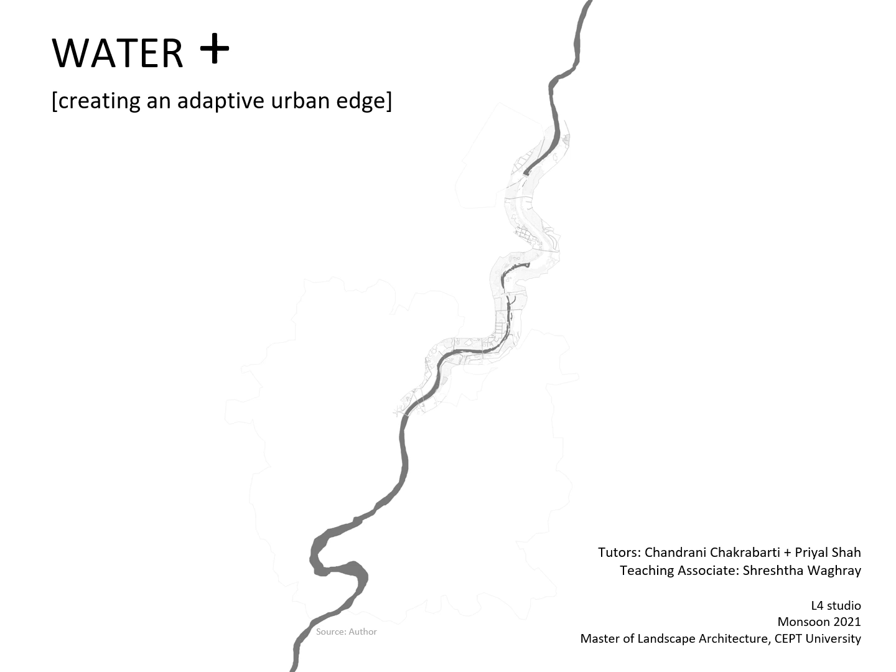The unit focuses on the link between water ecology and community. With urbanization, the role of urban rivers changes. To meet the demand of people as alternative means of water resources are imagined for the cities, people gradually disassociate from the river. Hence, with time, urban rivers are neglected and forgotten. In the absence of inner city public spaces, it is important to reimagine the river edges as the civic destination for the 21st century.

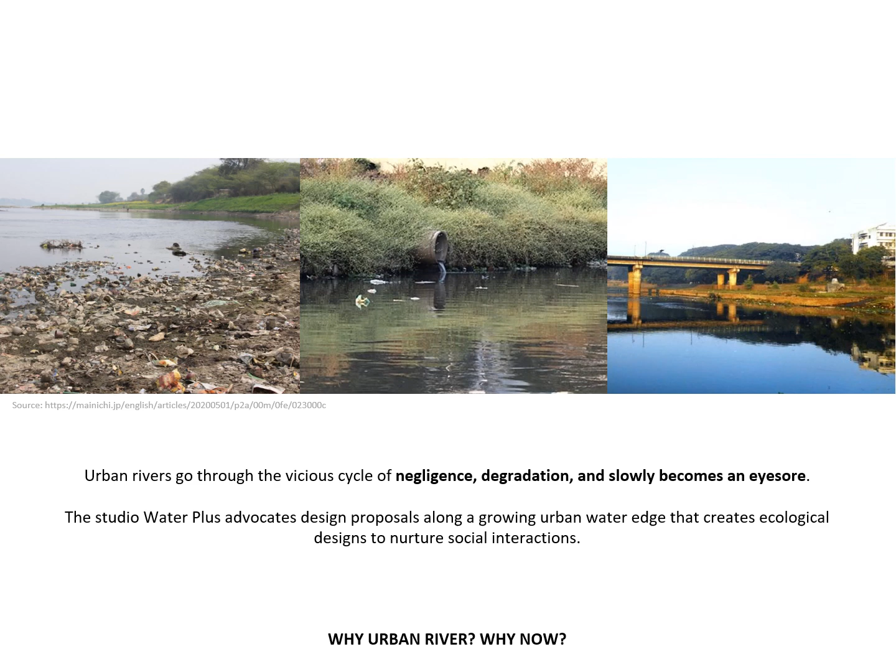Coming to why urban rivers? As mentioned, urban rivers go through the vicious cycle of dependence, negligence, degradation, and slowly become an eyesore, from dumping garbage, sewage, or simply being left underutilized. There has never been a more urgent need to restore these damaged river ecosystems than now. Coupled with this, the United Nations have declared this decade, 2021 to 2030, as the UN Decade on Ecosystem Restoration. The clock is ticking and the time is now.

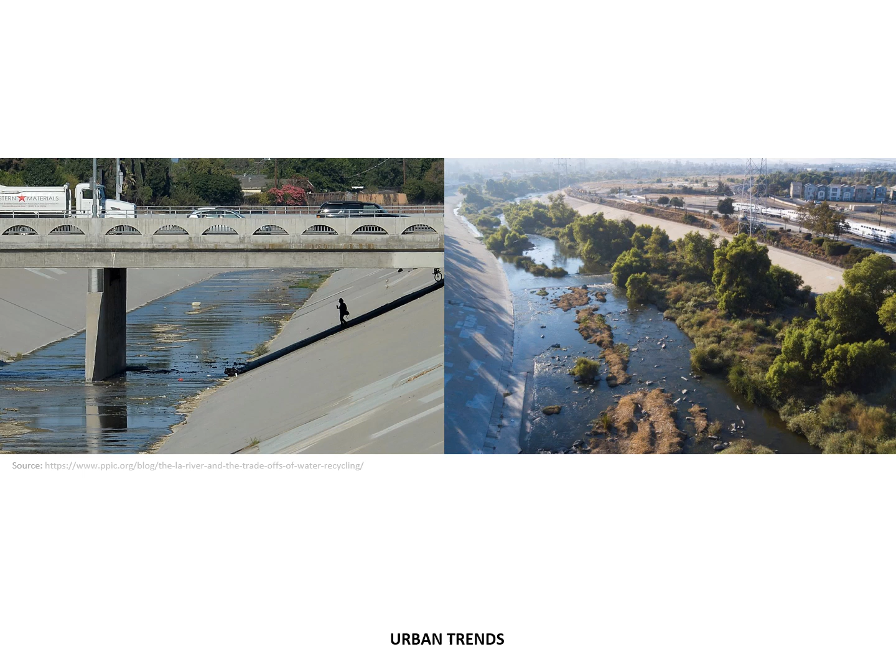Looking across the globe, we see an era of environmental protection and a similar drive to revive urban rivers. Projects are centered around the water edge, be it about increasing biodiversity of a neglected concrete storm drain, or reimagining the underutilized industrial riverbank.

Coming to the question, why here? By 2030, Ahmedabad-Gandhinagar agglomeration is projected to emerge as a megacity. The 28.3 kilometer phase 2 of Ahmedabad Metro project would link the northward developing areas of Ahmedabad as well as parts of Gandhinagar. This agglomeration will have a riverfront exceeding a length of 30 km. Ahmedabad has already set an example in riverfront development by designing the 11-kilometer long civic riverfront at the center of the city. Hence the question arises, how can we reimagine this edge to strike a balance between ecology and community?

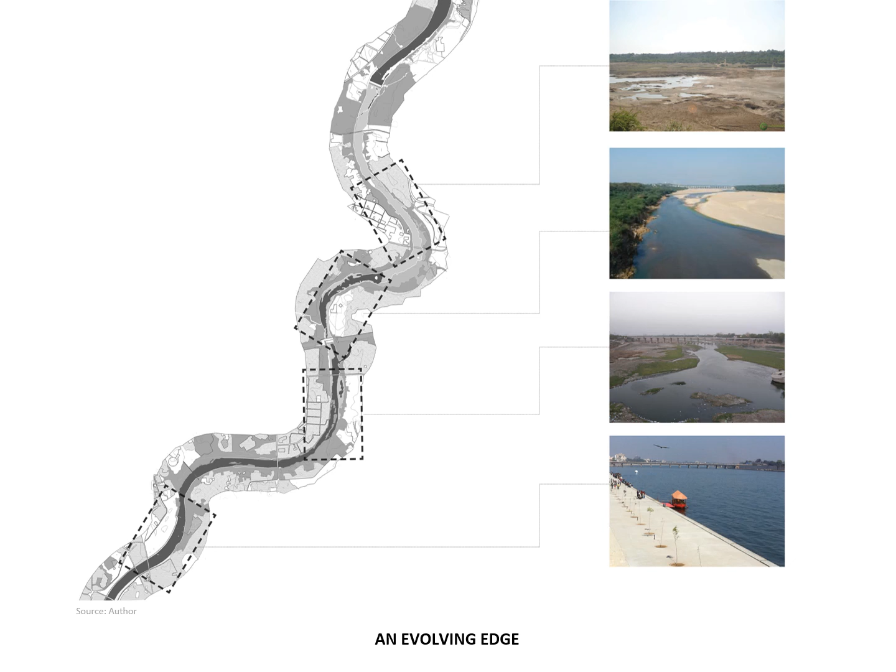In order to artificially hold water, the seasonal Sabarmati River is fed by Narmada Canal and has been intercepted with multiple dams to showcase water only next to the city. This has led to the creation of undesirable patches north of Narmada Canal due to dried up riverbed, vacancy, and complete disconnection from the urban fabric.

To sum up, the unit Water Plus hinges around these questions. Can we imagine an accessible social waterfront that is a great public space? Can this also be a dynamic working landscape that is resilient and responsive to environmental fluctuations? By showcasing the natural process, can this also create awareness and allow positive engagement with water?

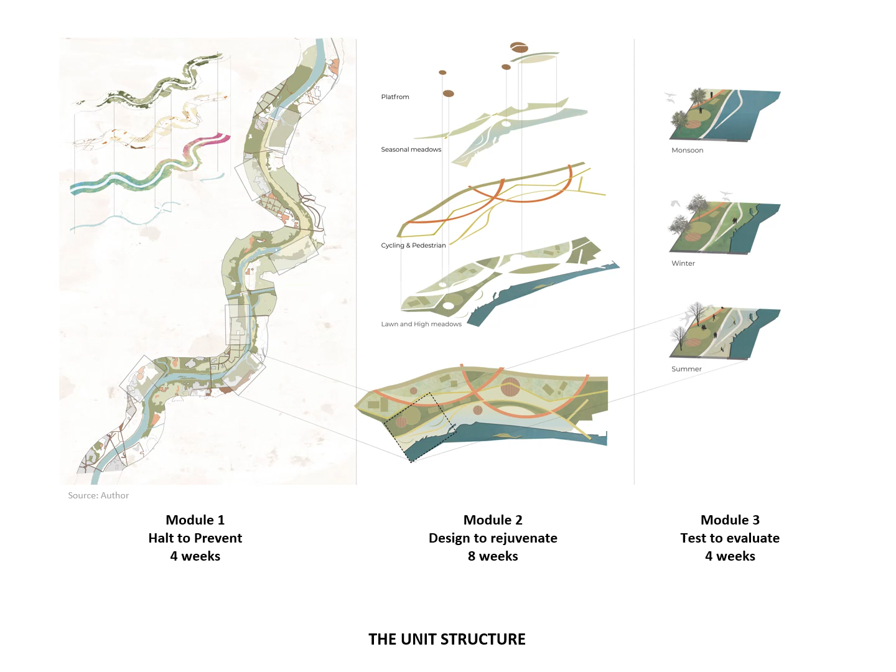Coming to the studio process, it is structured in 3 modules: Module 1, Halt to Prevent; Module 2, Design to Rejuvenate; and Module 3, Test to Evaluate. Module 1, Halt to Prevent.

This first module builds understanding and recording of the site at a larger scale. Students worked in groups of 3 to develop a collective master plan, frame a vision, and identify the potential sites of interest.

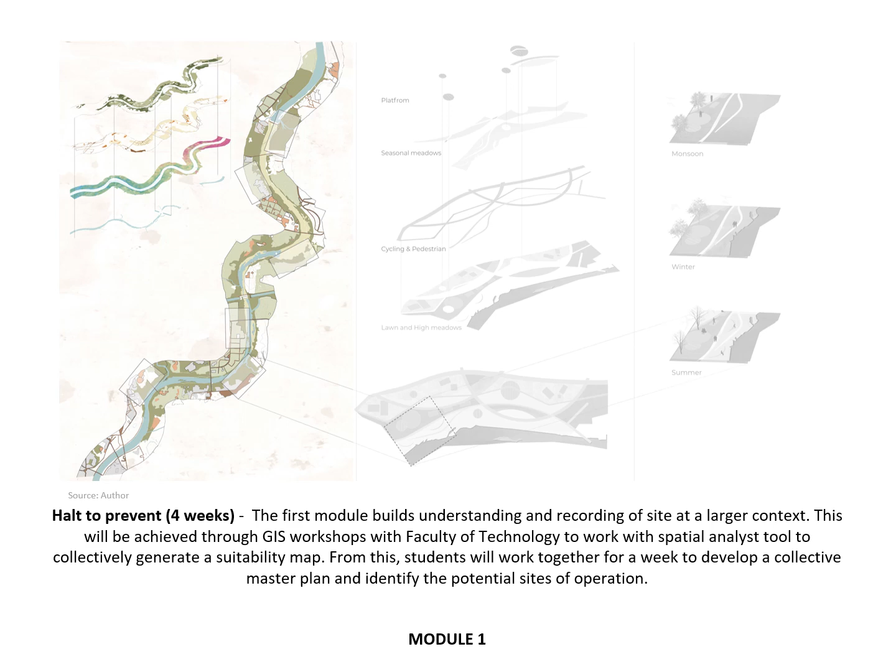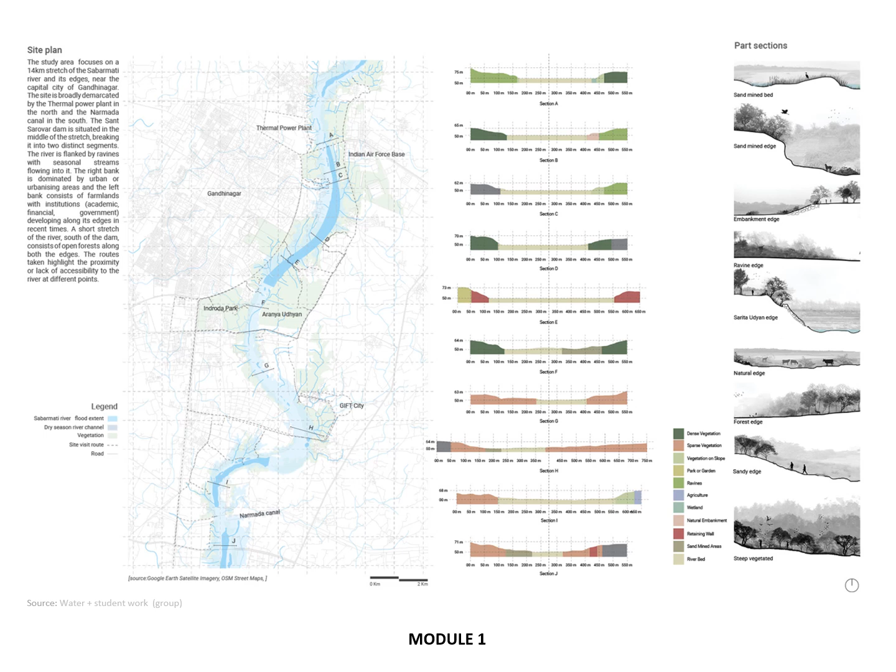Here, students started off by recording different site characteristics, like topography and its experience, character of the riverbed itself, vegetation grain, and soil types.

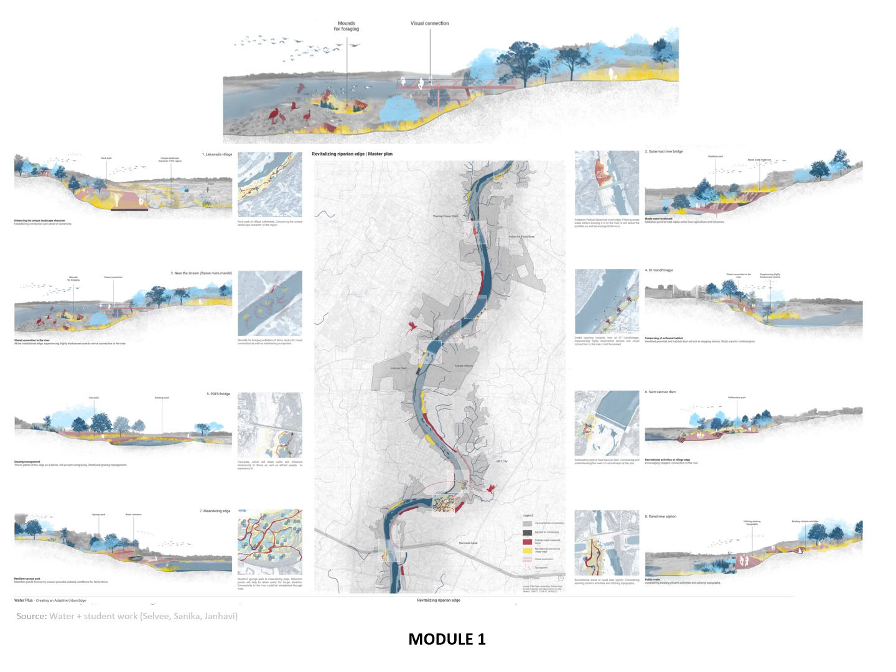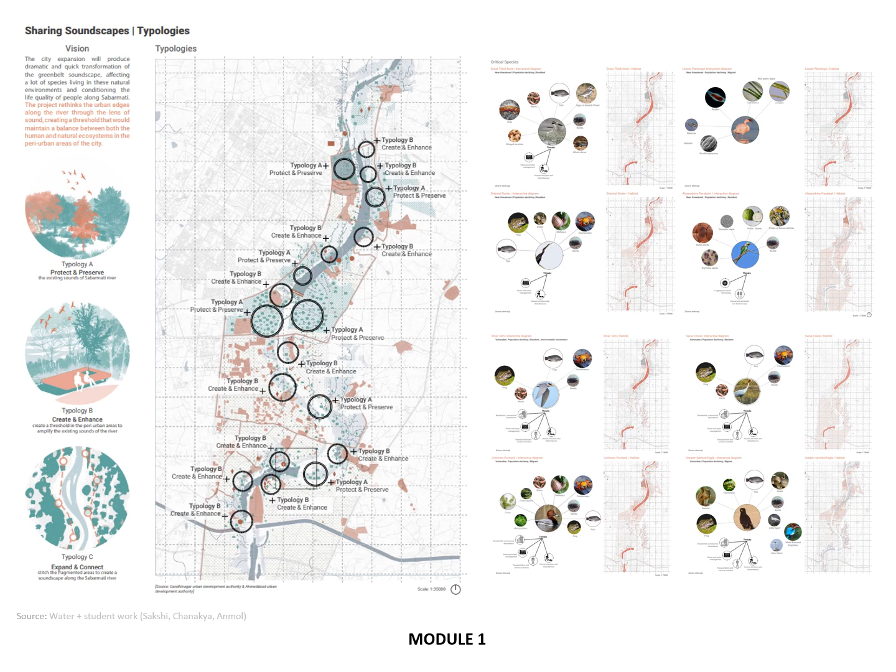These are some output examples from Module 1. This group identified the disrupted connection, both physical and psychological, and tried to reconnect the ecology and community through different edge typologies. Whereas this one looked at shared soundscapes by creating habitats for 8 identified urban fauna which are threatened around the site.

Module 2, Design to Rejuvenate. Moving along the framework set by the master plan, in the second module students individually selected their sites of interest, analyzed the site conditions, and demonstrated a design solution that works at the intersection of ecology and social spaces.

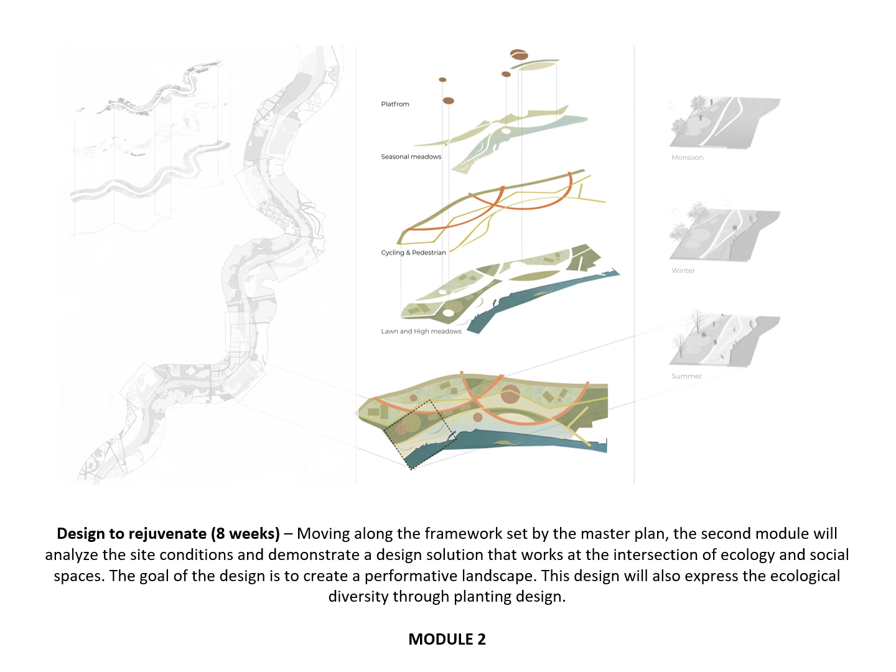These are some output examples. Students started off by exploring programmatic requirements, and then translating these programs on site and creating landscape types that work with the identified programs.

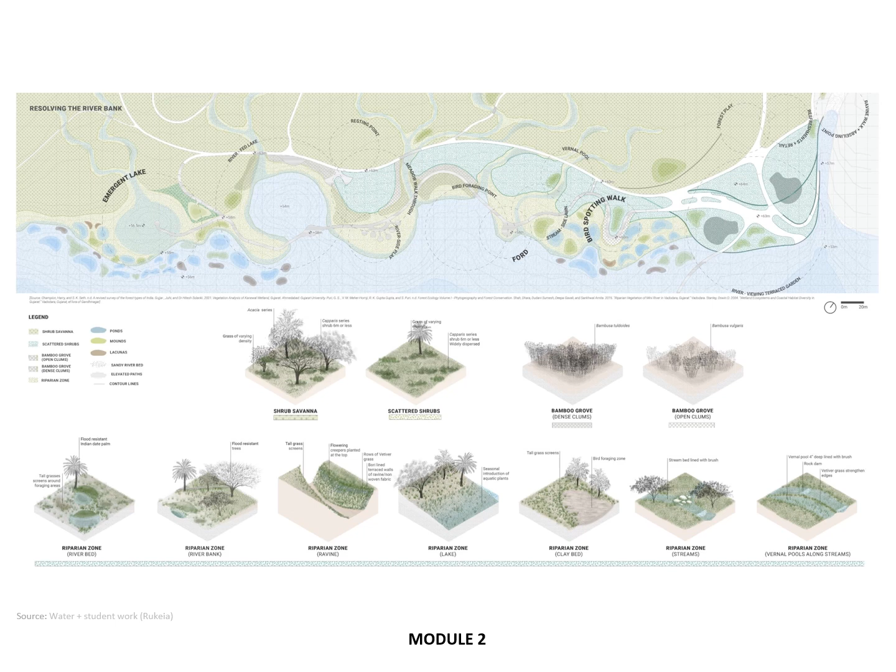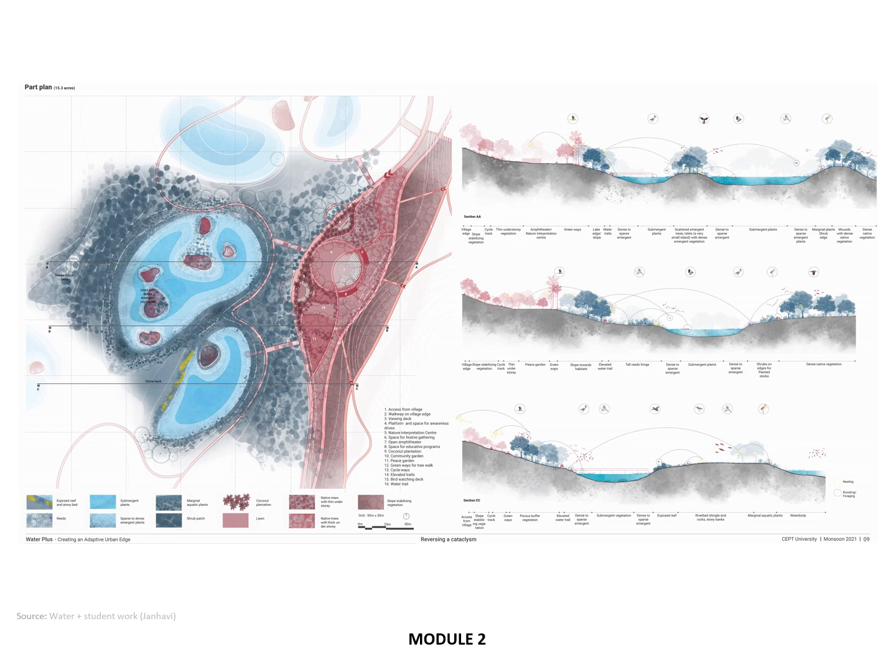The projects ranged along a wide gamut. For example, this project looked at the disturbed pockets on the riverbed created by post-sand mining sites, now covered with Prosopis juliflora. Utilizing these depressions as points of water holding, designed microhabitats for urban fauna were created. Whereas here, the project envisioned bold landscape inserts along the major corridors of infrastructure cutting across the riverbed.

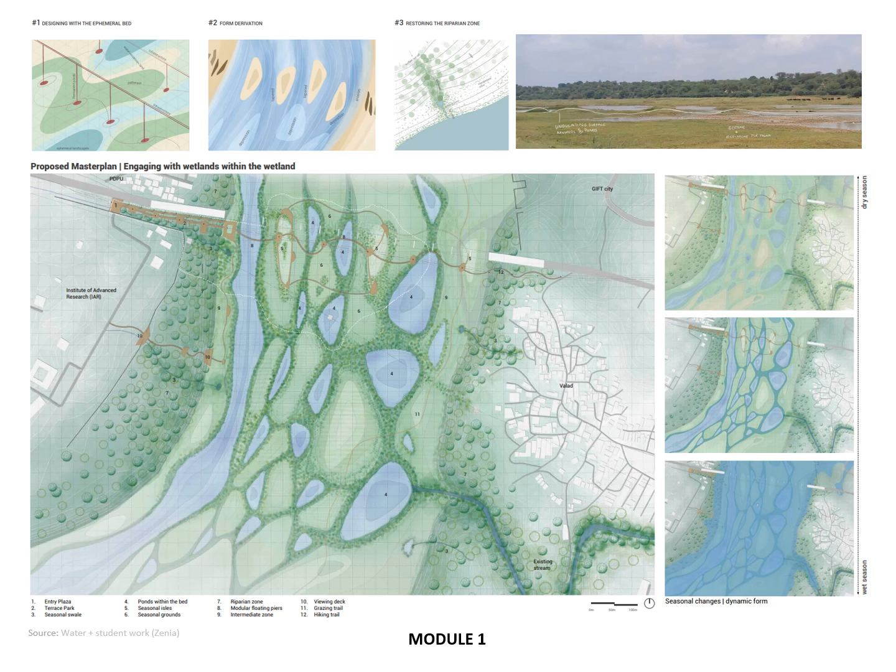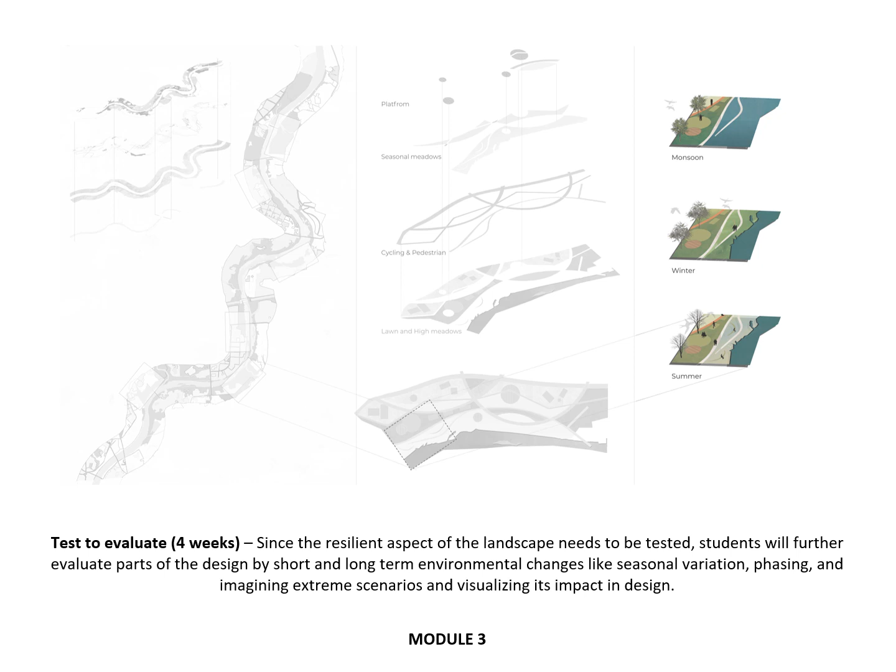Module 3 is Test to Evaluate. Since the resilience and dynamics of the landscape needs to be tested, students further evaluated parts of their design by short and long-term environmental changes like seasonal variation, phasing, and imagining extreme scenarios.

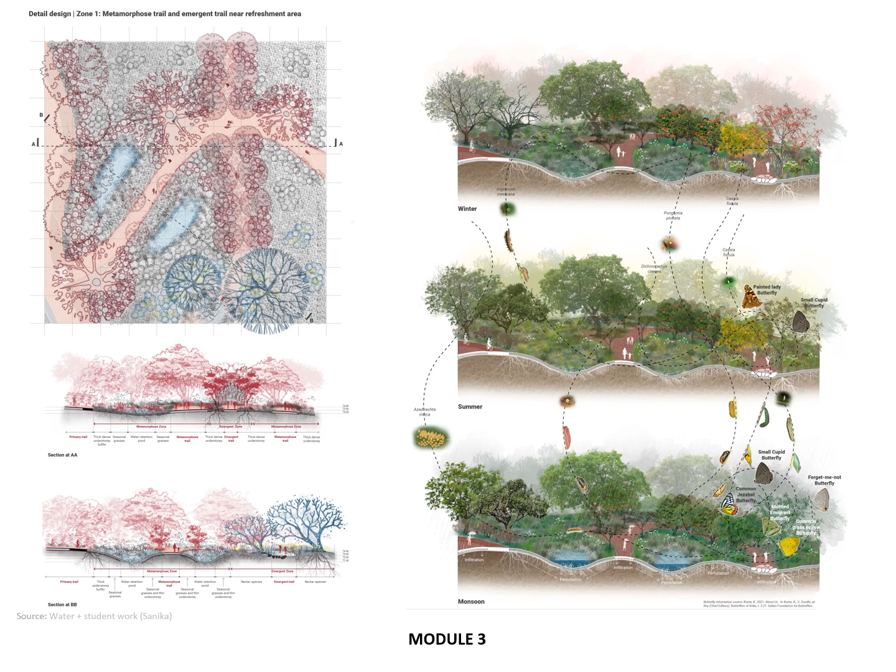These are some output examples from the studio. Here, the student detailed out the vegetation grain, keeping in mind how one can experience the life cycle of a butterfly across seasons, and further mapped out how the diversity of butterflies and their related host and nectar plants will change over time.

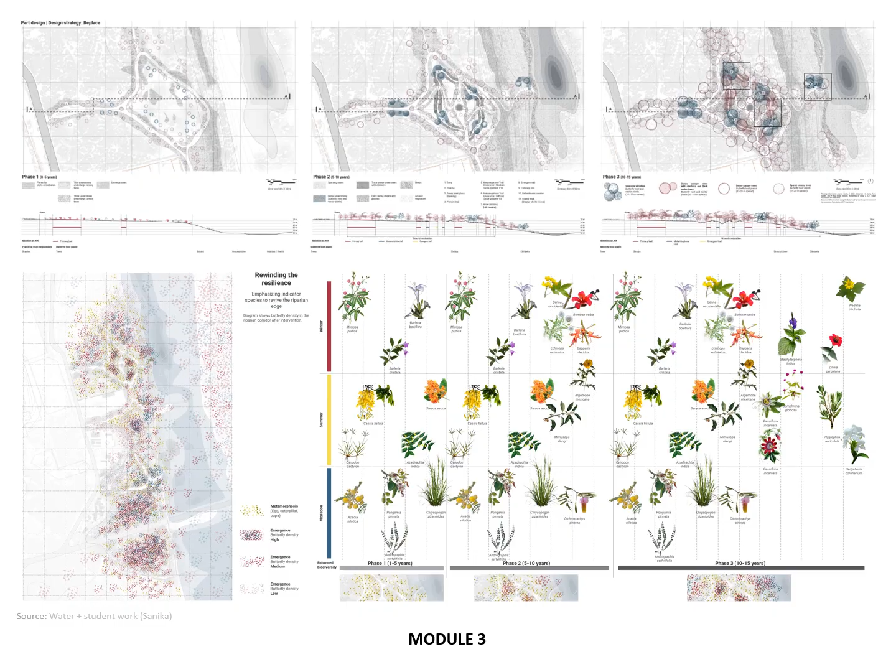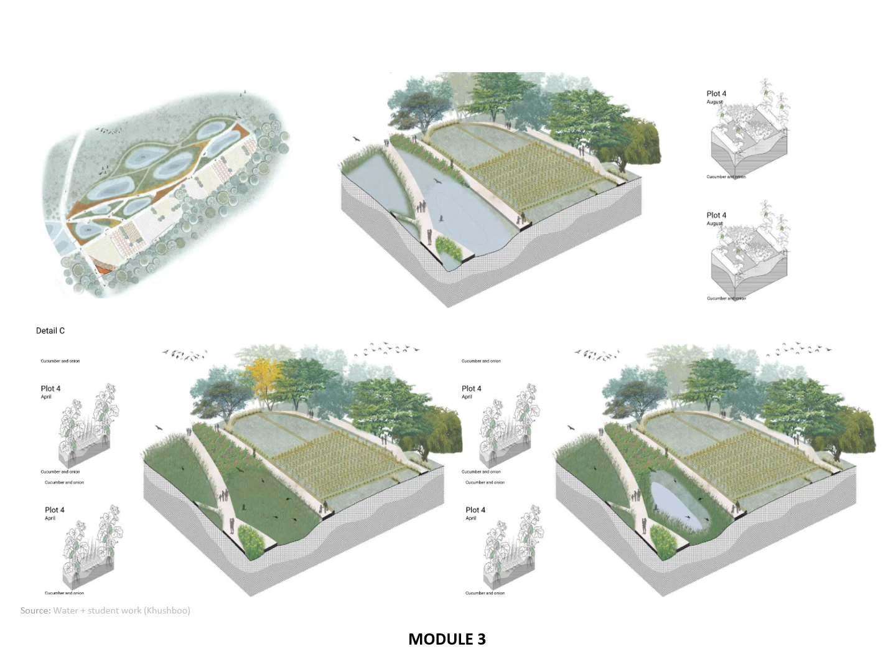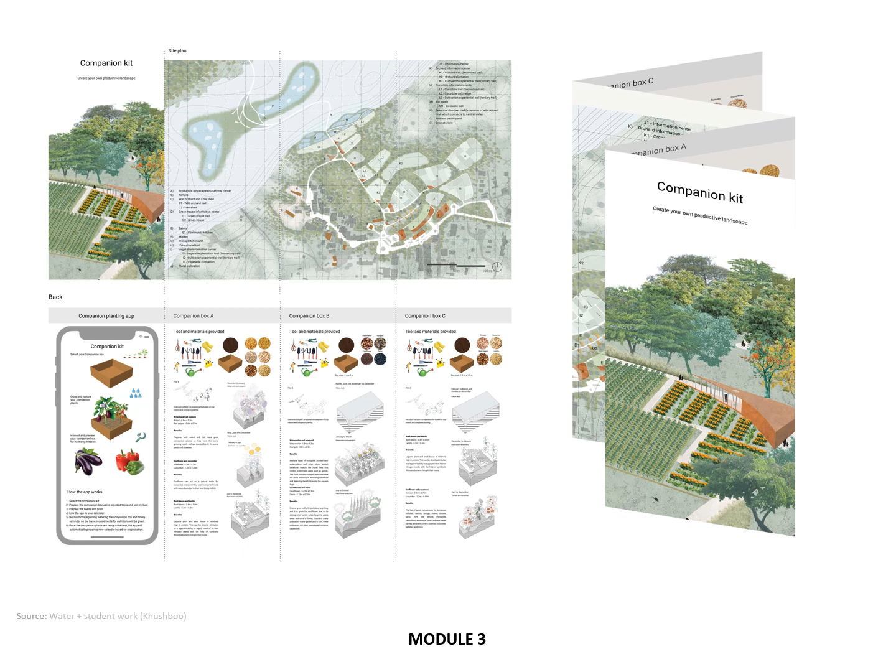On a different note, this project looked at reviving the lost productive landscape along the existing village, and testing on smaller plots to demonstrate seasonality and companion planting. Finally, designing a business model for the villagers where an app-based toolkit allows urban dwellers to buy pre-packed kits with companion planting. The studio learning outcomes are categorized in the buckets of skill building through soft engineering like hydrological mapping and urban ecology, and knowledge building through speculative detailed designs.

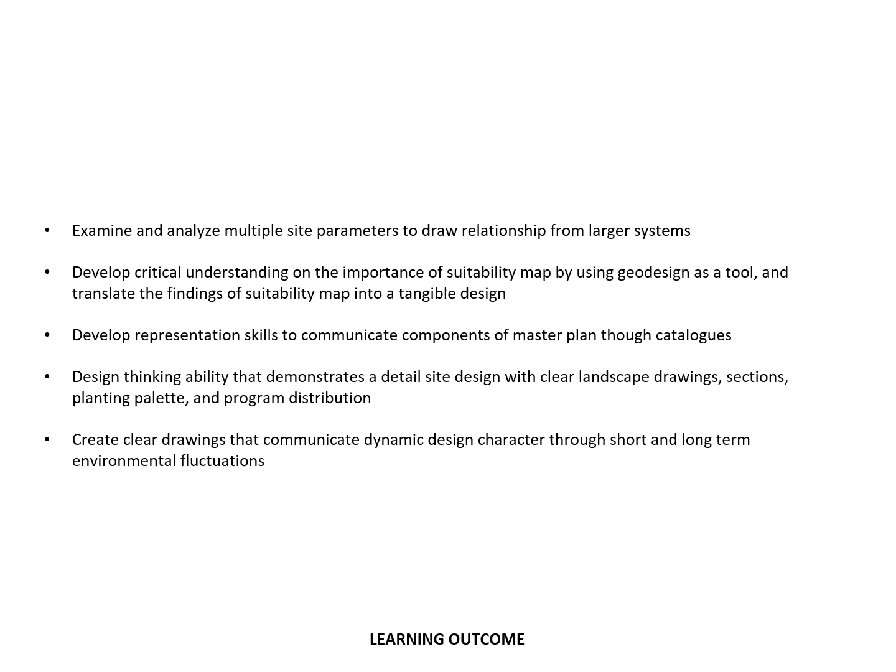To sum up, when we deal with water, there is no one-size-fits-all solution. Hence, the Studio Water Plus assesses site-specific character, devises an ecological management plan, and creates an active urban waterfront that can support a dynamic social program.